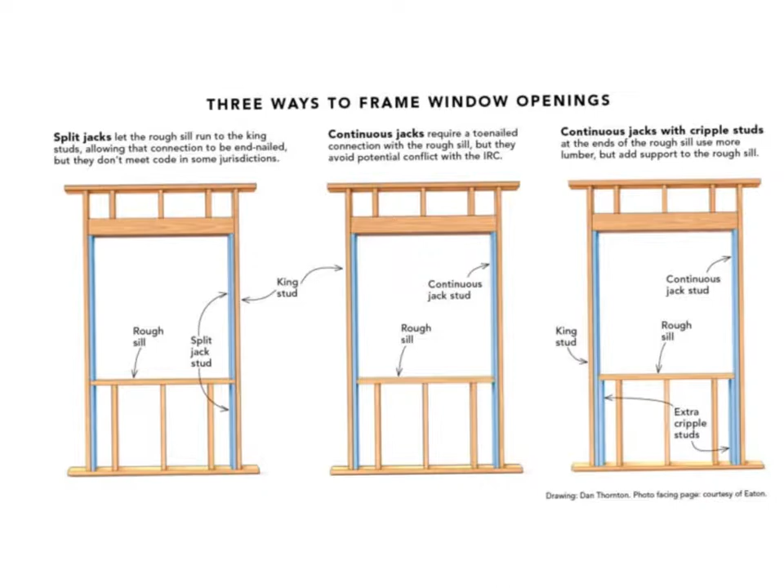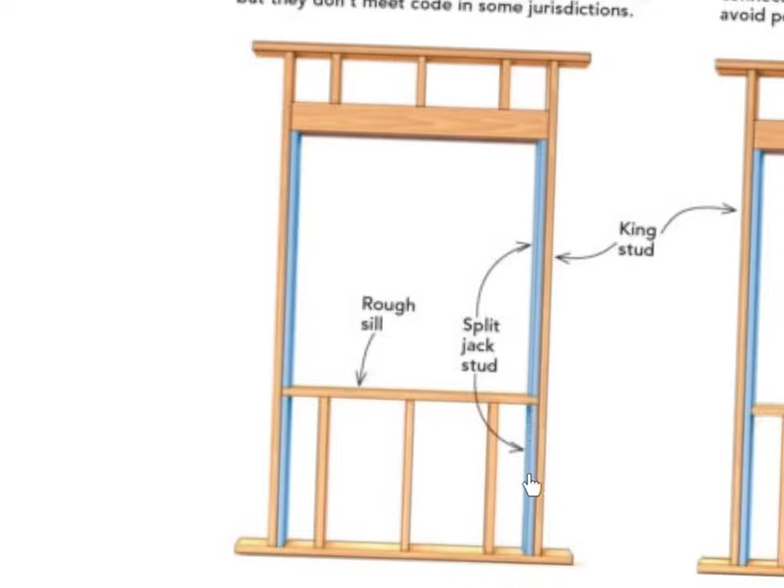I'd like to draw your attention back to the three ways that are acceptable to frame a window. And of these three ways, remember, I want you to frame the window for this class this way. So we have our rough windowsill. It is the same length as our header up above, with the trimmer directly below, and then split jack directly below the windowsill as well on each side.

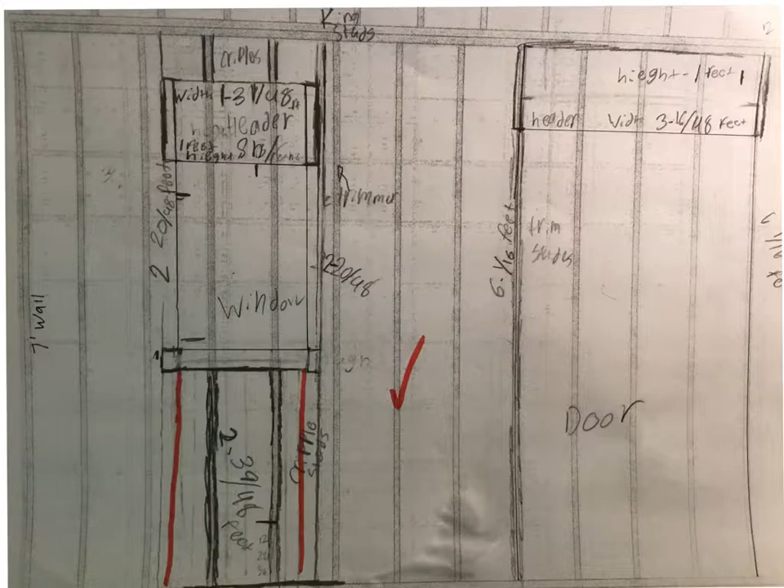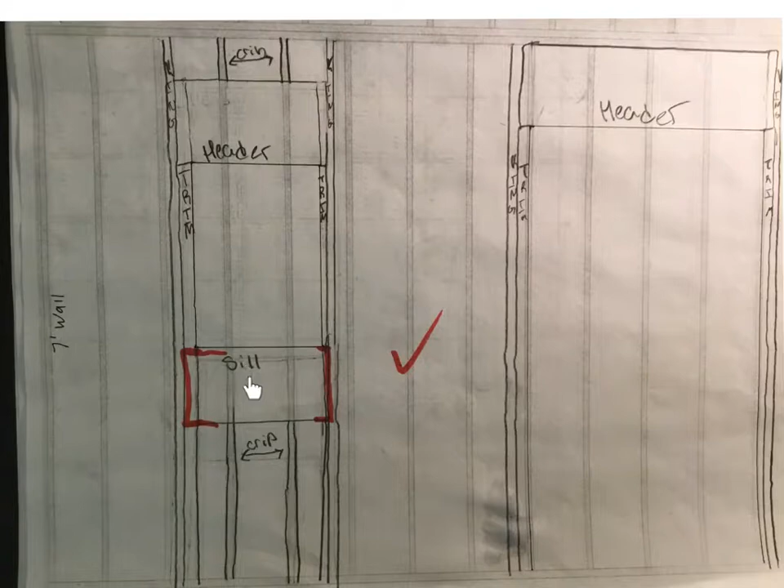On this one here, the doorway is good. The trimmer comes directly below the header. The header goes out the thickness of the trimmer. The only thing I did see here is that this windowsill A is really wide, and our windowsill should only be the width of a regular stud because the sill is just a 2x4 laying flat across here. And then also the sill stopped, it butted up to the trimmer.

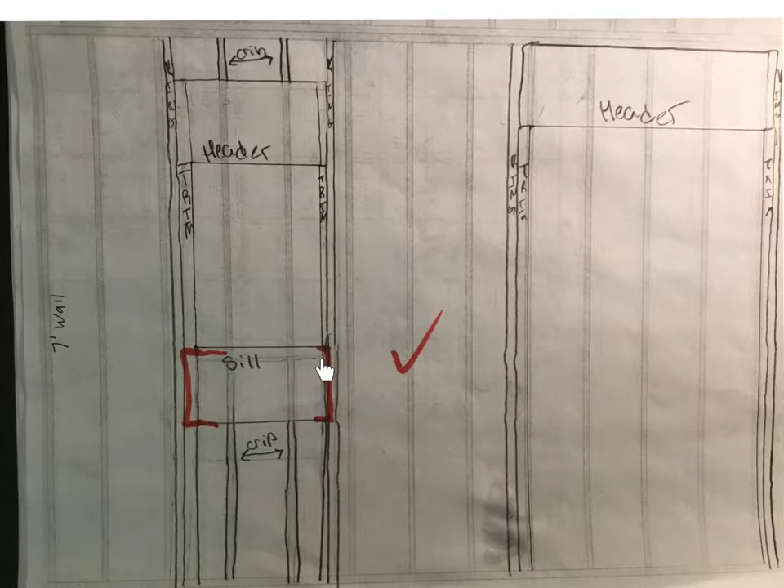We want to go through the trimmer, so the windowsill and the header should be the same length as each other, but the width is different. It should not be this wide. The header is a foot wide. The windowsill is only the thickness of a 2x4, so it should look as thick as these other 2x4s.